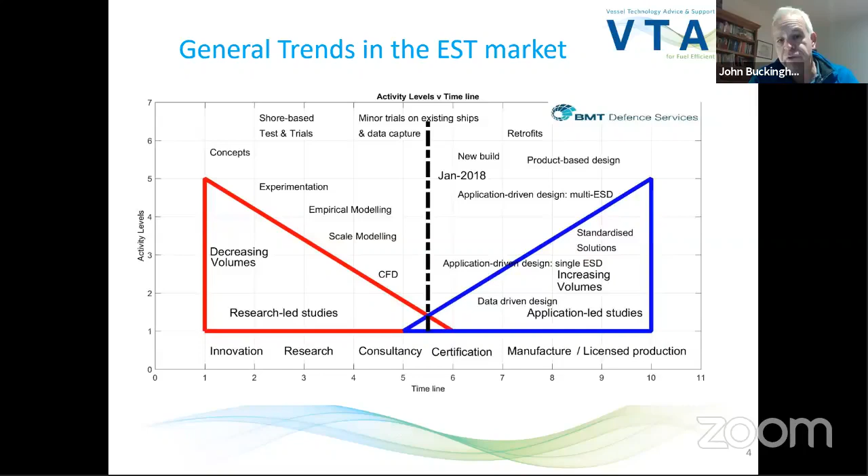I'm not going to talk through the details of every slide, but I think you can see the amount of papers and novel research diminishing as the point is made and the evidence is there, and there are increasing ships with wind-based devices. Now we've got hope. It's all about how do we make unit production cost lower to reduce payback periods, and to make the units easier to put on and off, integrate and operate.

So VTAS is all about us - BMT and Black & Veatch - integrating technologies and methods, procedures and other elements to make the whole thing move forwards.

This obviously isn't shipping being a worldwide operation, a very disparate number of types of owners and operations - there is no one size fits all, no one solution fits all. We're trying to be in the middle of a number of principal stakeholders: owners, operators, the people who can finance this as a new means of green funding. There's a greater number now of financial institutions moving out of oil and gas and other sectors into shipping and green technologies as a whole, not just for shipping. And then, of course, there's the cargo owners and those who wish to have their cargo and produce moved by ship in a way that is more socially responsible.

Those of you in the UK are going to be missing a bit of the Panorama program tonight about the reason why we're doing all this - the fact that global warming and climate change, now that we've put COVID aside, is a much larger and imminent danger, and for many people is already an issue in terms of flooding and literal inundation.

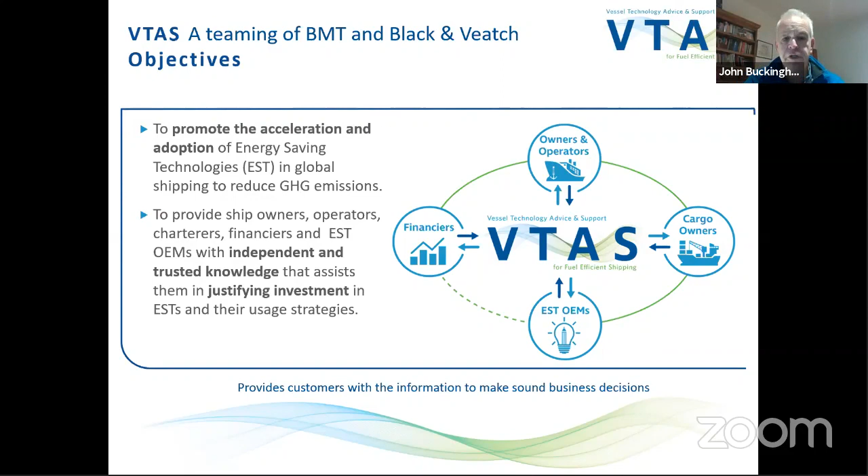So that's our objectives, and Black & Veatch and ourselves have a good match in respect to the fact that BMT is a leading marine engineering and naval architecture company, both for commercial shipping, based in Southampton in the UK, and naval engineering for the Royal Navy and other navies in Bath. So we offer quite a lot of analysis in terms of systems - not just propulsion and power analysis, but also, as you'll see, it's quite important to fundamentally understand the other systems relating to cooling and heating.

Black & Veatch, a world-famous, American-based company with a large presence in the UK in terms of wastewater and other such installations. But in this particular project, they brought with them their knowledge of port infrastructure, LNG handling, and, as you can see there, the way they engaged with the large number of stakeholders that we spoke to when we were doing the ETI project.

The challenge is, on one hand, to try to demonstrate to ship owner operators and other stakeholders why they should fit an EST, an energy saving technology, and what benefits they can expect, and the usual question is, when is the payback? Clearly the fact that we're having that kind of conversation shows it's not all just about greenhouse gas emission reductions, it's about doing something to save money.

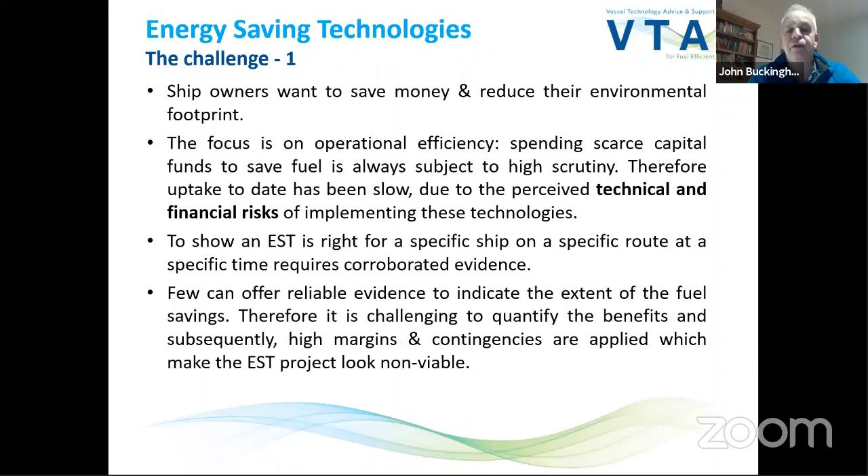So the other issue is CapEx. How do we understand better how to fit equipment to ships? How can we retrofit ships in a way that's affordable? One of the big issues is that we don't have time. The IMO wants us to introduce a reduction of 40% in energy intensity by 2030. Fundamentally, that means we've got to do things to the ships we have, not just the ships being built. And actually, because of the trade situation, there isn't a big demand for new ships, so we really have to address existing ships and find means to make them operate more efficiently.

Now, clearly, since the 2008 global financial crisis, we've had slow steaming, and that has benefited shipping and fuel consumption in many ways, but you can only go so slow. If you want to move so many units from China to Europe, if you go at half the speed, you need twice as many ships, and then, because resistance and power vary with the cube of speed, you may still make a saving, but fundamentally you've still got a massive issue with CapEx of that many ships and many more crew.

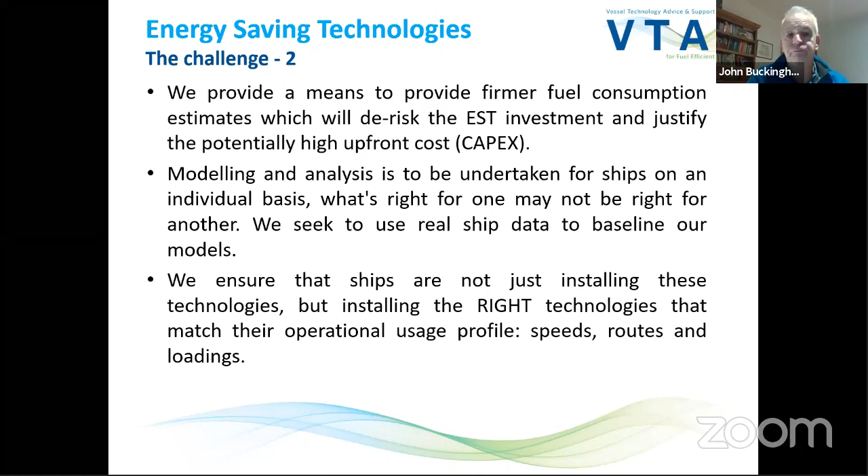So it isn't just a question of slow steaming, it's also an issue of CapEx and actually making best use of your assets. What do we try to do? We work with the ETI.

They funded us to do a project which we started about 3-4 years ago, and we studied with the ETI and Black & Veatch for about 2 years to develop tools and methods, and more importantly, insightful analysis to allow us to work out how best to get an uptake of EST. So we look at ship operations, we look at ship data, the parametric data for power and propulsion systems, and we see how the ships are operated.

What do they do? Many of them may be ferries, they may be charter-based, going from A to B and B to A, or they may be trading more generally. That's the fundamental part of what we do, but we've also been looking at alternative fuels. There's a paper you can see at the bottom there, Future Fuels for Commercial Shipping, that I gave at the RINA conference earlier this year in person.

And there is an awful large amount of scope for adapting the circular economy for shipping, where we could make better use of waste wood, waste plastic, and domestic household refuse, as they do in the States, to create fuels such as isobutanol, which can be used as drop-in fuels to help reduce dependence on fossil fuels.

They're not the ultimate answer. The ultimate answer is zero carbon fuels, electrofuels from green energy: ammonia, hydrogen, etc., methanol. Obviously methanol still needs carbon, but fundamentally these are considerations for the immediate situation, and many of these products are disposed of in a way that's not very efficient, so-called waste to energy, where a lot of them are just burnt for heat and not actually transformed through thermal hydrolysis to useful fuel.

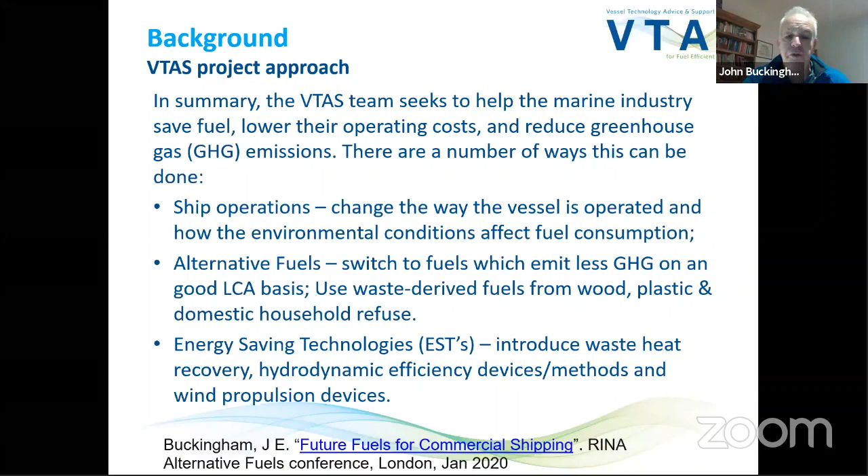So we generally categorize energy-saving technologies into three principal sectors: the wet, the warm, and the windy. Wet is hydrodynamic, whereby it's fundamental that we try to make sure the hull has less resistance, the propeller is more efficient, and therefore there's a lower power reduction on the shaft line.

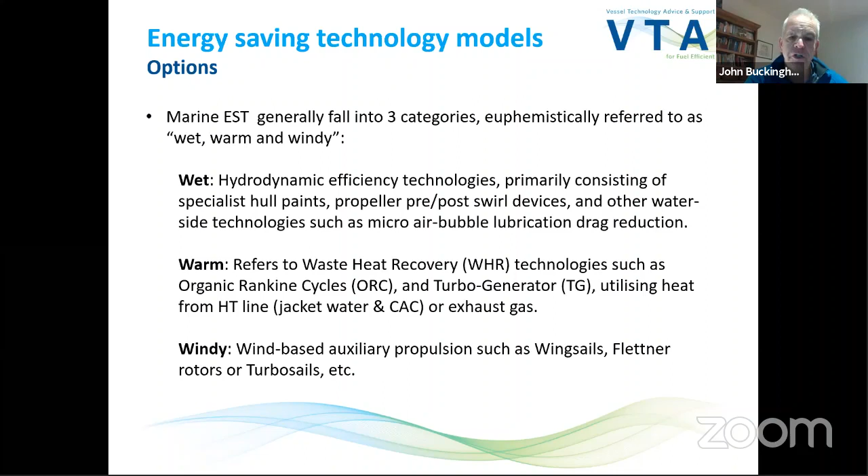Warm addresses the fact that internal combustion engines generate heat when operating. So we take heat from either the jacket water, charge air cooler, or exhaust gas to drive things like absorption chillers to make chilled water, or organic Rankine cycles to make electricity. But ideally, you reduce the load in the first place by having lower resistance and lower loading on the machinery. What wind gives you is the fact that you're using renewable energy at source directly on the water, without using green fuels, to fundamentally reduce the load on your machinery and therefore reduce fuel consumption for propulsion.

I'm talking here generally about larger vessels, seagoing vessels, cargo, tanker vessels, and maybe container ships, although they're not very conveniently designed for wind-based devices. But fundamentally, I'm talking about solutions that don't involve batteries or hybrid batteries, because the energy and size of batteries for ocean-going journeys would be considerable.

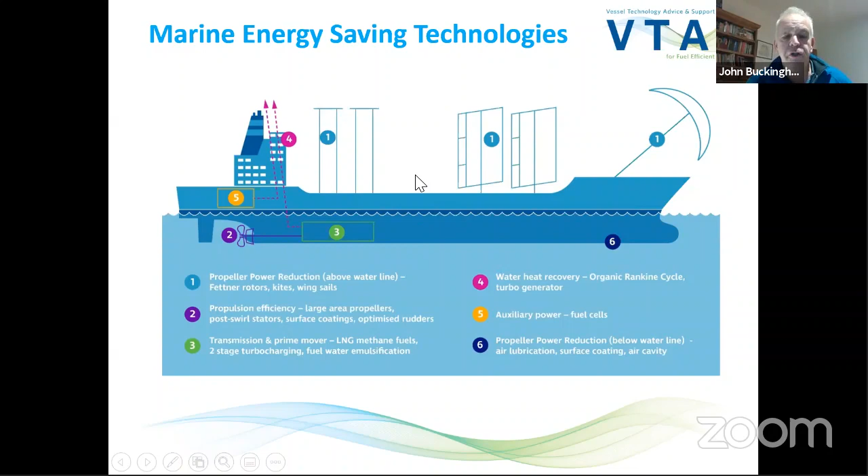Even though I'm going to talk mostly about wind-based devices, I've got a listing here of major equipment and solutions, some of which have fallen out of favor. We used to have a Grim vane wheel on the QE2 liner many years ago, but it fell off, so there's no supply chain for those anymore, really. There's no demand, but propeller boss cap fins are popular, albeit they offer 1 or 2% at most.

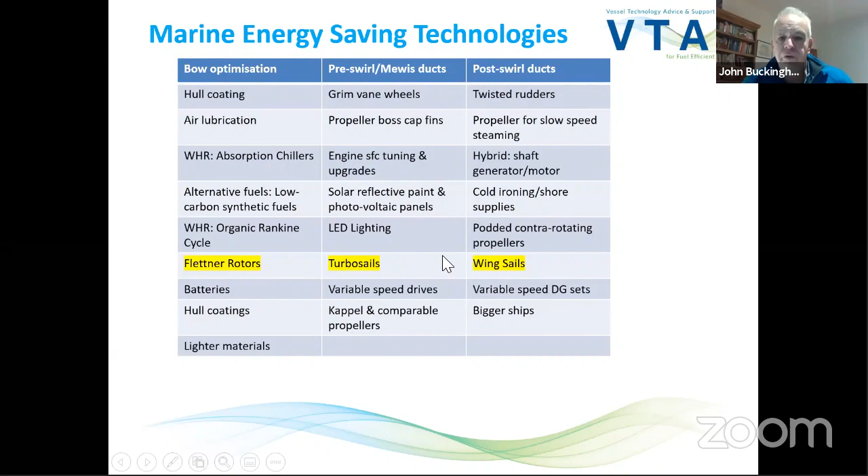I'm not going to go through all these, but you can see that they all collectively provide a benefit. It is arguably better that the wind-based devices can offer the quickest way of reducing the emissions on a ship.

So in short form, we model the ship's resistance. There's methods like Holtrop and Mennen, or ideally we might put it through CFD analysis to work out the resistance that way. We model the propulsion system - we have the propeller KT-KQ curves and the engine characteristics. And we seek to build our software model, a mathematical model of the ship's power and propulsion, with the data we get from real ships - ship data, as I call it.

We model the energy-saving technologies either using first principles - trigonometry and published values for lift and drag - or we work with suppliers of energy-saving devices and use their own coefficients. The principal wind-based energy-saving devices we use are these three. More about those in a minute.

Fundamentally what we're trying to do is show, in historical form, for past ship voyages that those ships undertook, what would happen if they'd had a different energy-saving device on board. What fuel saving would they make, and consequently what greenhouse gas saving would they make? Obviously the greenhouse gas, usually CO2, is about 3.1 times the fuel saved, so if you saved 1 ton of fuel, you'd save about 3.1 tons of CO2 emitted to the atmosphere.

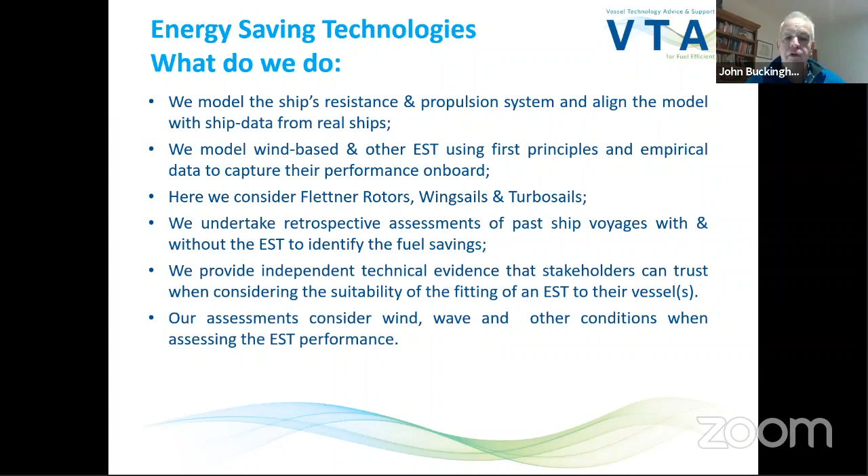Unfortunately, so much about modeling with data is all about getting good data about ships and their cargo loads. The ship at sea will have hull fouling, which is difficult to identify, but we've got ways around that.

The fundamental thing we do is make sure we declare all our data up front so it can be challenged, and obviously people can review the models and approaches we make.

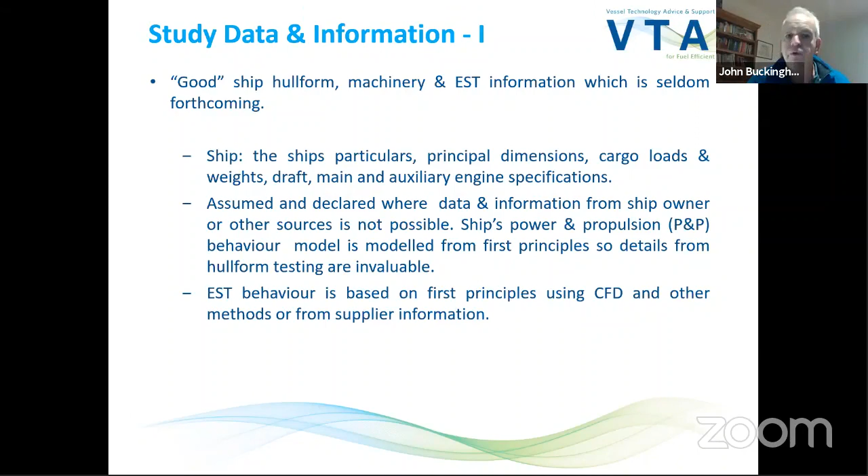We have two models, static and dynamic. Static models are where we look at the ship situation at every knot speed from 1 through to top speed, with and without the energy saving device at different sea states, and we also consider all the different parametric data from the sea all the way through to the fuel.

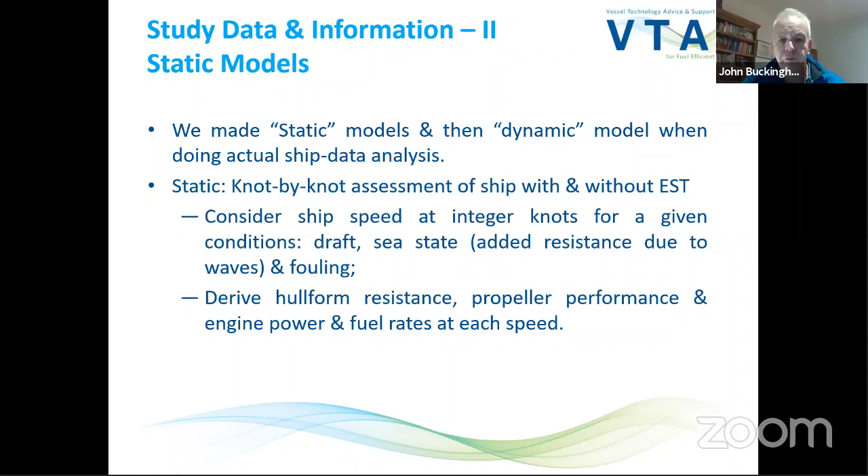Dynamic is where we take the ship data, analyze each time step, each increment of data, and work out the location of the ship using various meteo sources. We use quite a lot the European Centre for Medium Range Weather Forecasting data offline, and there are numerous others.

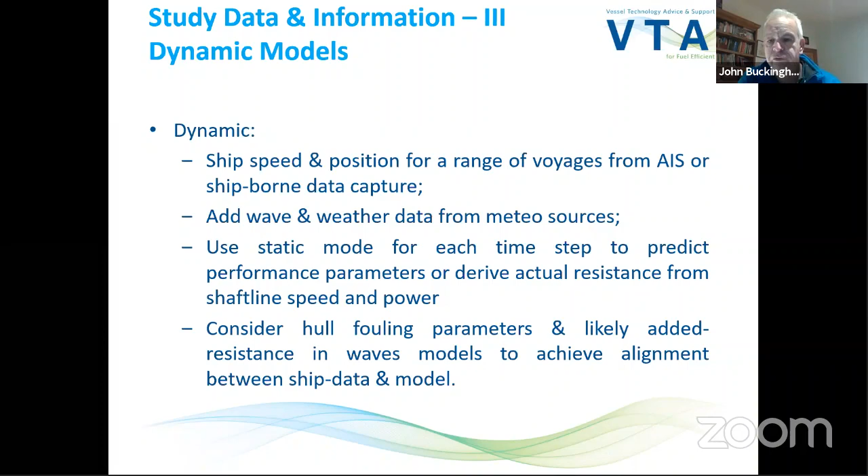We add the weather data to the situation so we can then analyze that ship in that particular sea state, with wave height, wind, temperatures and such like, to work out basically what the forces are on the ship.

Much of the data - many ships today have fleet performance management software systems that capture data, either sampling every second or all the way through to say 5 minutes, where it may be a composite of process data for 1 second.

We've worked with different ship owner operators, treating each of these in their own way, in a way that allows us to interpret as best we can the performance of the ship and, more importantly, its behavior.

The 1 second data can be very challenging in other ways, because what you're essentially looking at is the behavior of the ship when it's pitching, rolling, and yawing. So fundamentally there is a dynamic component - the ship is accelerating forwards, up and down, and around.

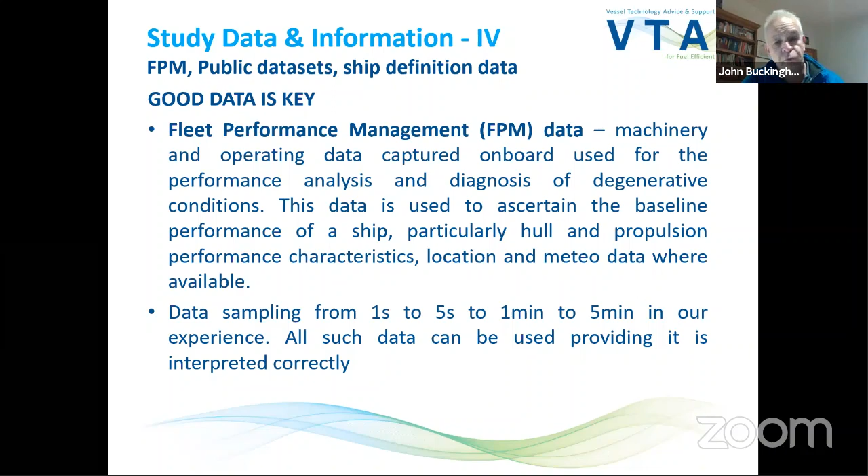That's why the analysis always has to be interpreted very carefully, because fundamentally we're not doing a sea keeping model - we're actually trying to interpret data on a 1 second basis. When you see that data varying considerably from one second to another, you also have to be mindful of just how good the sensors are.

Meteorological data is very important. Humidity is important in terms of the density of the air, and that's important for wind-based devices.

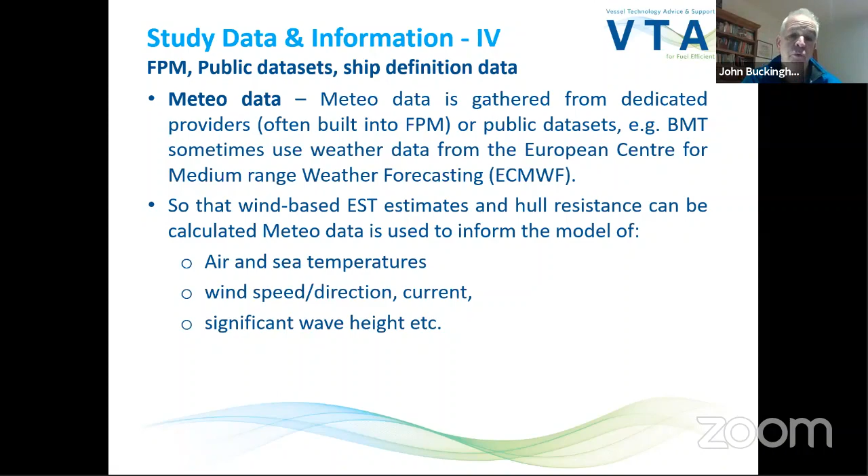The significant wave height is important so we can try to better understand the added resistance in waves. We do a force balance on the hull - in this case it's a Flettner rotor - looking at the forces due to the apparent wind, which is the wind based on the trig combination of the true wind plus the ship speed.

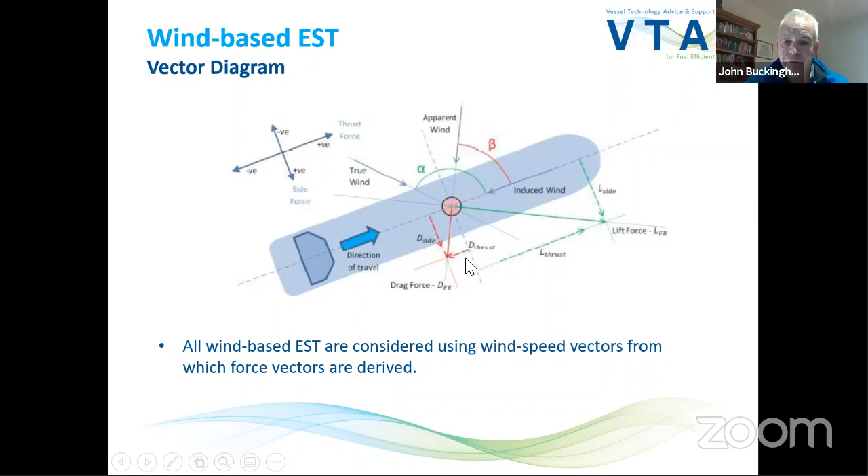We've got the drag due to the wind passing over the Flettner rotor and the lift component, and those two get combined to provide the actual thrust. Of course, you also get side force, and that affects the listing or heeling of the ship as well.

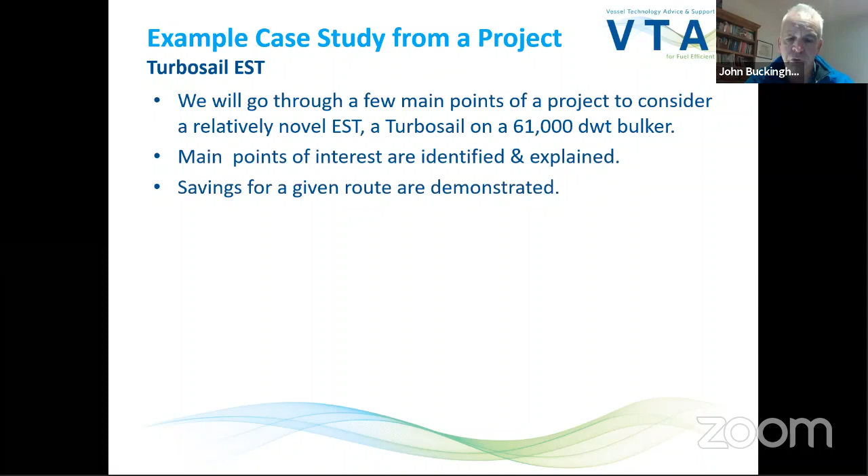As an example, I'm going to go through a project we've done with a turbosail on a 61,000 deadweight bulker, but I'll also be showing you some Flettner rotor work on this as well.

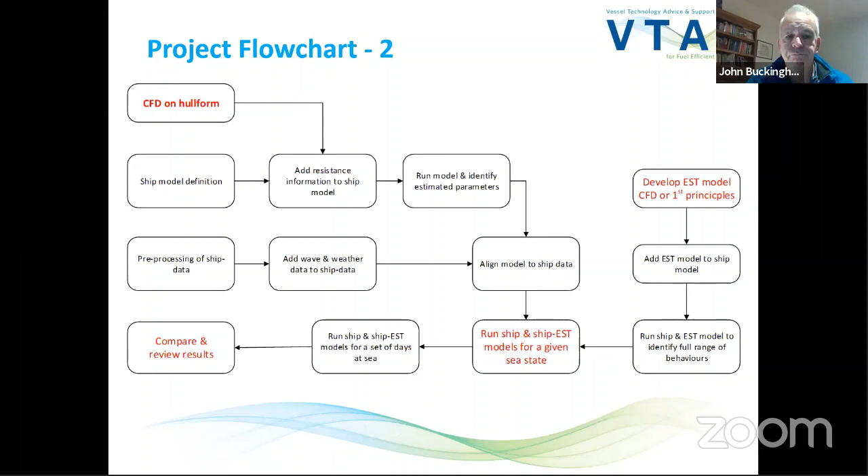This is the kind of high-level project plan on how we address a project such as this. We've got a pretty good idea on what we do, one thing after the other. I'll just talk a little about the ones in red since we're limited for time. The ship in mind is a 61,000 deadweight bulker - principal data points there.

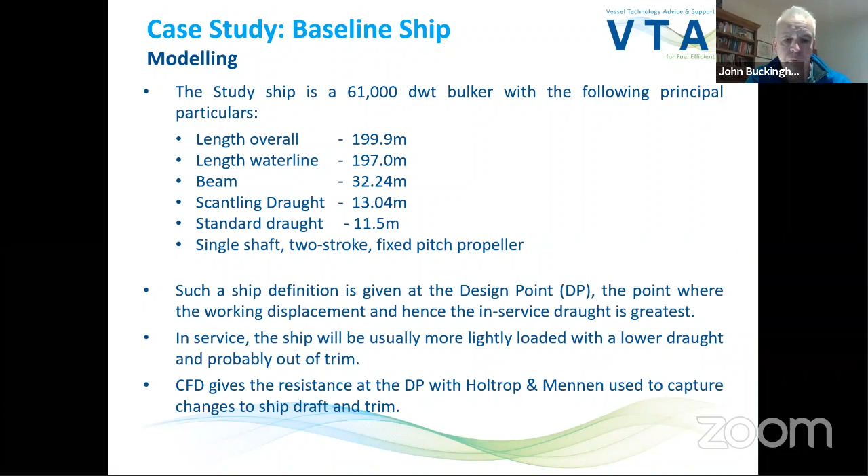One of the things we try to do is align the data we get from the ship with our own model for hull, prop and main engine, and also analyze the hull form using 3D modeling and CFD. We've used NumECA, but at BMT we're now using ANSYS as well, and we trial many different methods and software to address that.

We also identify from our database of hull forms that go back over 50 years, from when BMT was part of the British Ship Research Association, and also tied up with the National Physical Laboratory in Teddington, Middlesex.

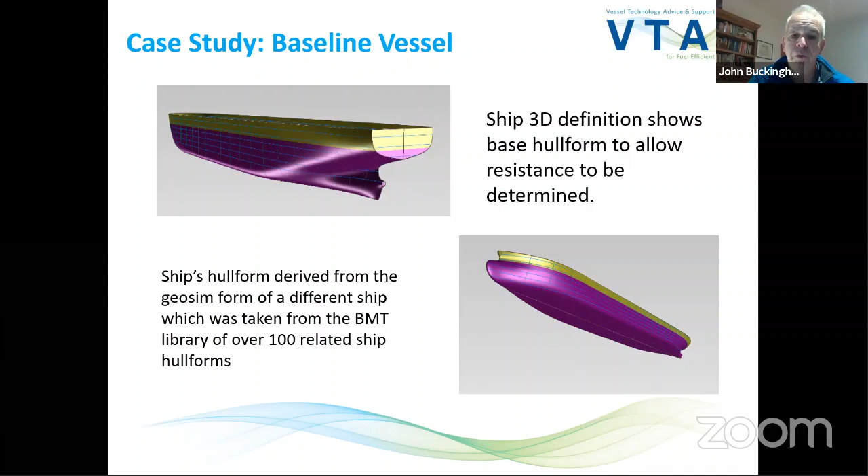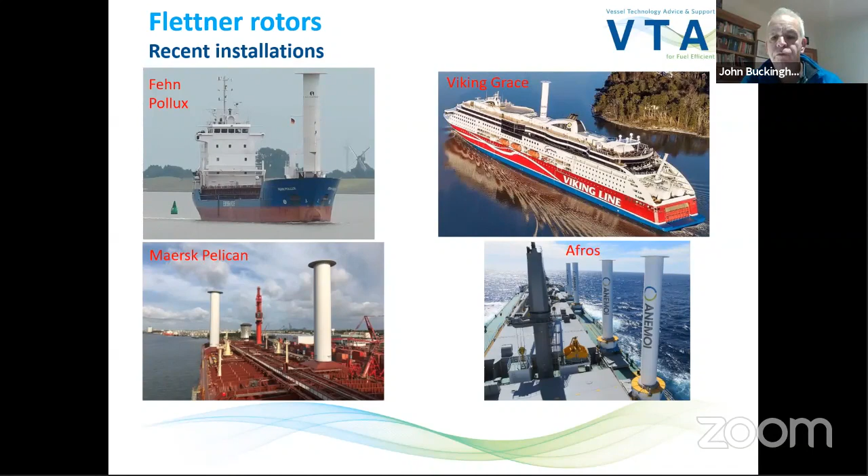And then bottom right, you've got Afros. The MV Afros has got 4 wind rotors from Anemoi Marine Technologies, based in London. And if you can see in the picture there, novel means for moving them so that you can access hatch covers and such like.

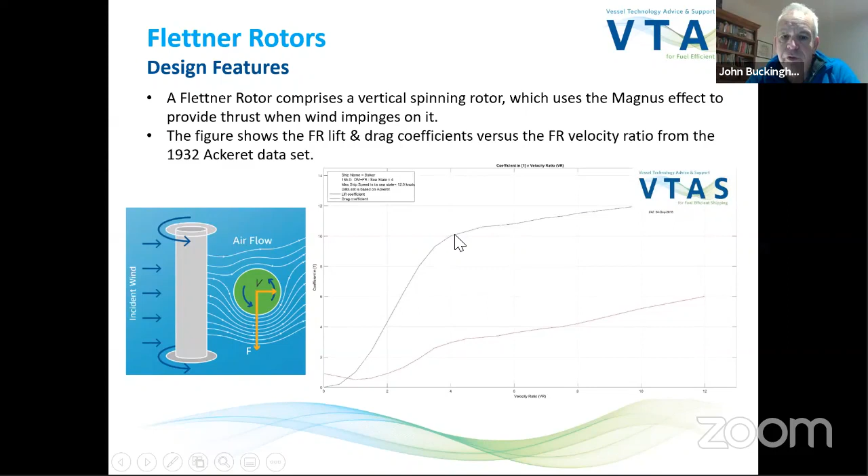So what is a Flettner rotor? Well, it was designed by Anton Flettner back in the 20s, and basically he looked at it for helping increase the lift on the front wings of aircraft, but he also derived it for use in driving ships, or his own private yacht. What you can see there is the lift and drag coefficient. As the velocity of the rotor goes up, we get very high lift coefficients of about 10 using the area of that particular Flettner rotor.

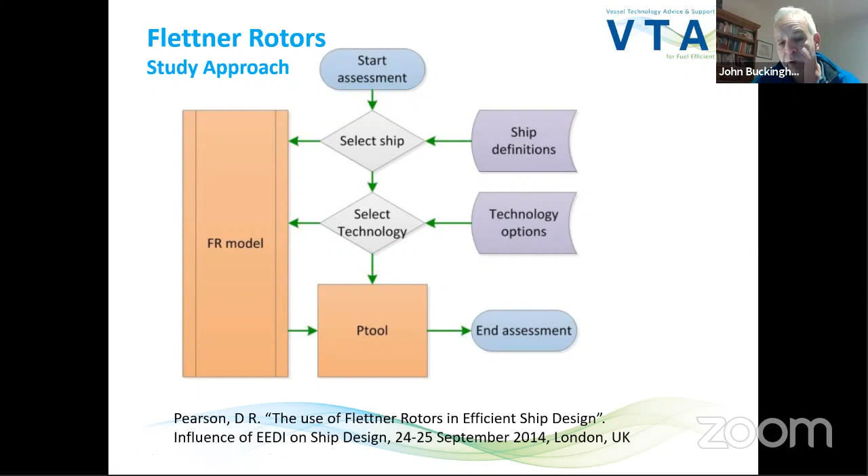So what do we do? We've got a Flettner rotor model, fully trigonometrically wired up, which considers all the power required to drive it, as well as the issues with drag, and also what speed you need to turn it to get the best benefits. Our own software, called Ptool or VESDA, we've got 2 different types, which allows us to do the assessment based on the ship definition and the technology definition. David Pearson wrote a paper back in 2014, which is on ResearchGate, and that gives a very good idea of the kind of modeling we've done. We've improved the model a bit since then, but the fundamentals are the same.

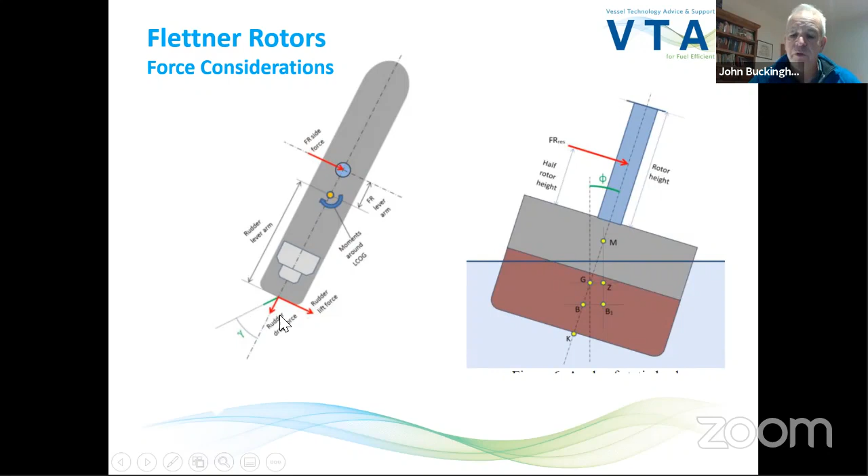I talked about the forces due to the wind on the Flettner rotor, and also the angle caused, accentuated here. But more importantly, perhaps, if the ship is rolling, this effect is minimized. Actually, we've heard that sometimes the forces due to the Flettner, just like in sailing on an ordinary sailboat, can dampen the roll motion, so that's not such a bad thing. But also at slow speeds in high winds, the Flettner, when running, can cause issues with moments around the center of gravity, and consequently the rudder angle may need to change, and we model that as well. We also, because of manoeuvring at slow speeds, have considered the wind direction and speed, and how the Flettner rotor may need to be modified in terms of its speed and direction.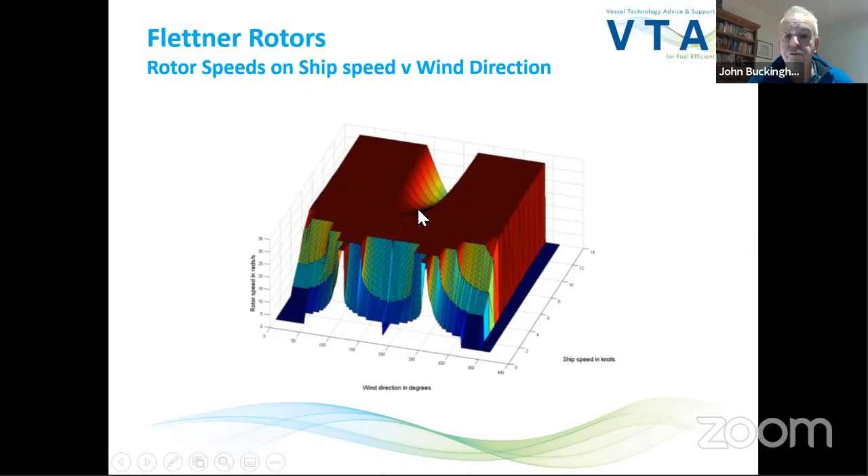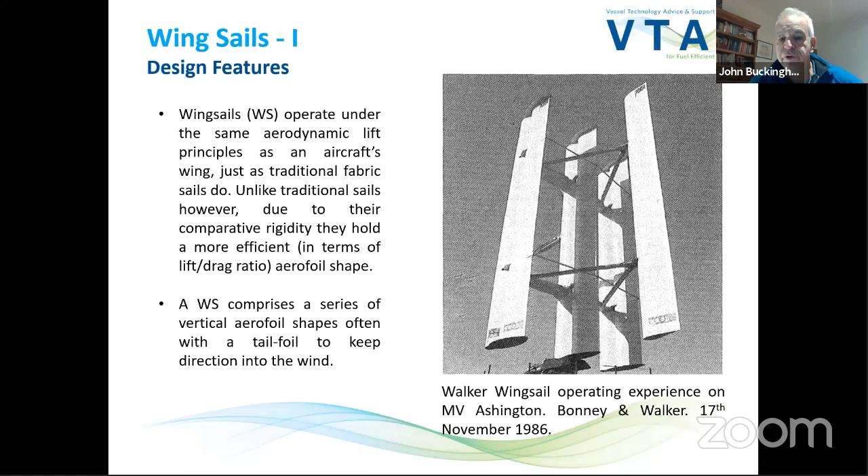Another wing design, undertaken over 40 years ago, is the Ashington, designed by John Walker - the Walker Wingsails. As you can see, they're essentially vertical aerofoils, which provide a much higher lift compared to an ordinary sail. They were fitted on the Ashington, atop the bridge, the wheelhouse, and the master of the Ashington, who lives near Bath, who I met a couple of months ago, is always very positive about it and how beneficial they were for manoeuvring, for pulling away from the wall if the conditions are right. But clearly that company is no longer in existence.

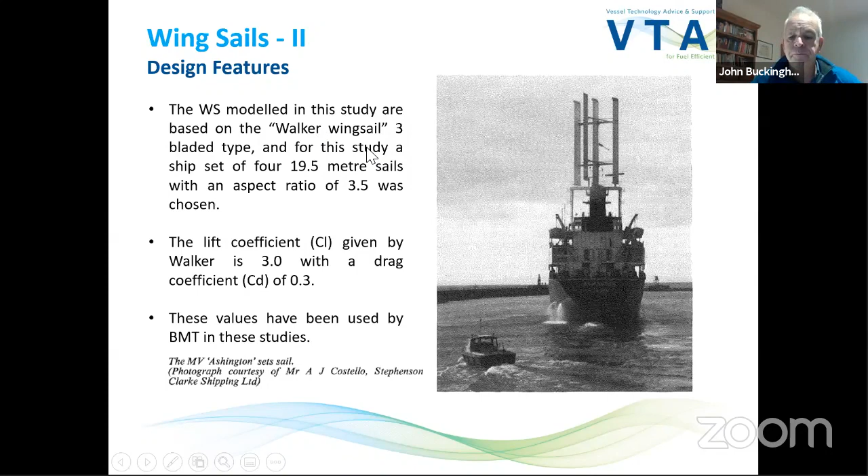The modern company taking this up, not necessarily with exactly the same design, is a company down near Southampton called Windship, which is also using technology from the America's Cup and other high-tech yacht racing to try to bring this through to commercial shipping. I'd like to draw your attention to the issues commercial shipping has, especially bulkers and tankers, with fitting wind-based devices - obviously the visibility from the bridge looking forwards. That's something I'll talk about later.

The turbo sail is the third technology I want to talk about. Basically, it was a way of having a smaller sail using an egg-shaped profile, but also using a suction side and a small fin to basically give some lift. This was originally conceived by Jacques Cousteau and his son, and they fitted it to their yacht, the Alcyone, but it was never developed further. People more recently, like Hcini, have done papers recognizing that it has benefits.

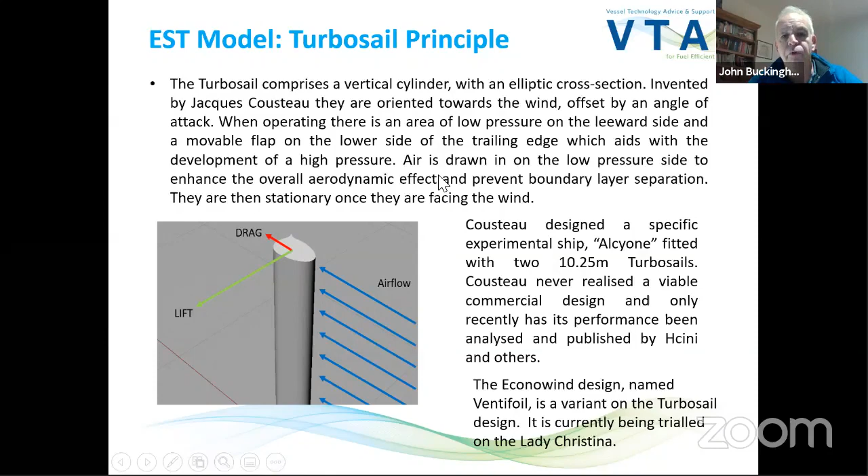A Dutch company called Econowind now have their own product called the Ventifoil, which is now being moved onto various vessels. So how does it work?

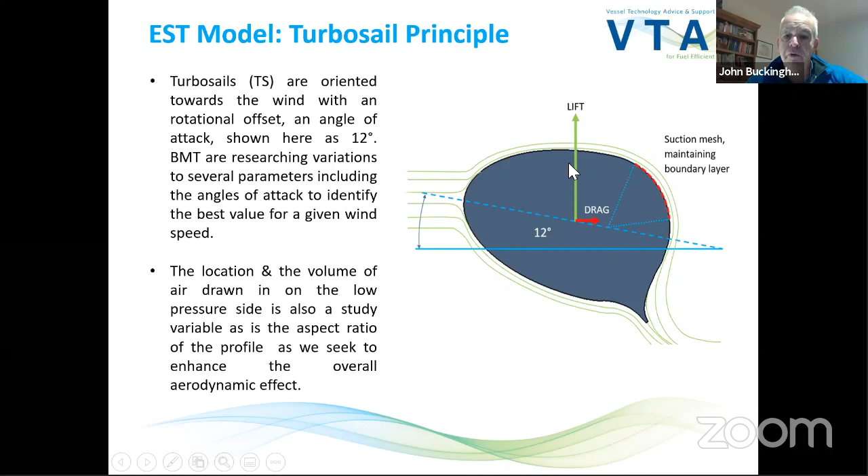Fundamentally, we're still trying to get the benefit of a higher pressure here and a lower pressure here. The lower pressure is also enhanced by this suction area, which maintains the boundary layer around the edge of the turbo sail, thus increasing the area of low pressure so that you get the biggest benefit around the egg shape. Here's the Lady Christina.

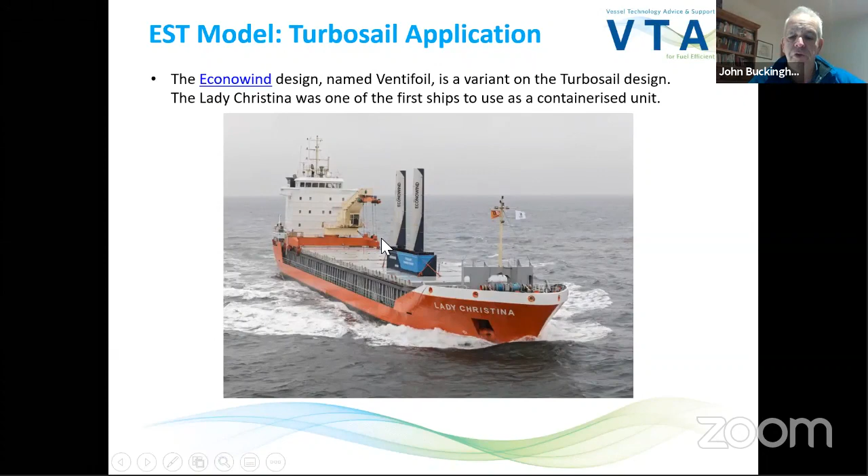You can see they're fitted here to the inside of a container. They can be folded down and put in the container. This was very much a couple of years ago when they were developing the technology, improving it. Now it's fitted to a few more ships, and there's probably many more that they have in production. But these are just a few to give you an idea of how they're moving forward.

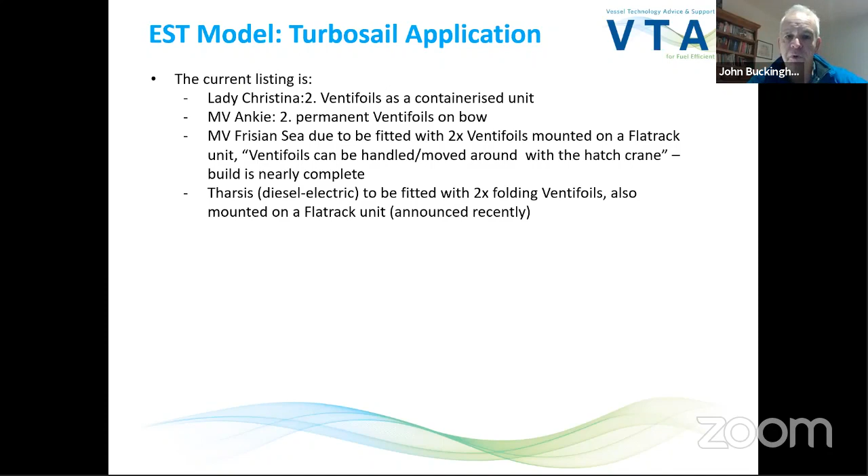My colleague, a year in industry student that we had called Will Hopes, is giving a paper at next conference at RINA next year on wind-based devices, and he'll be talking a bit more about how the turbo sail has been modelled by BMT.

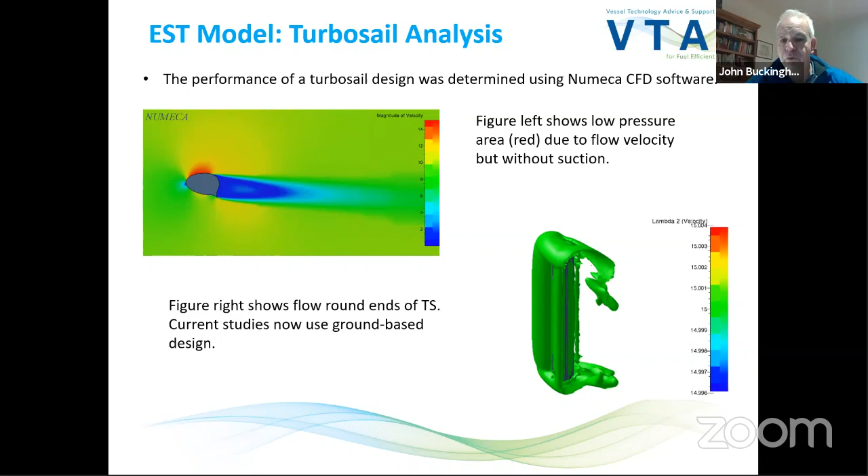The work we did looked at the issues of without suction, how we basically lose the connection around here, and then we've also looked at issues with the end losses of thrust at the ends, and obviously it's important to also have a deck when you're modelling these devices.

If you actually have the suction, you have the boundary layer going further round, your lower pressure area is further round, and therefore you get a better overall performance. Again, this will all be in Will's paper that he's writing with David Pearson.

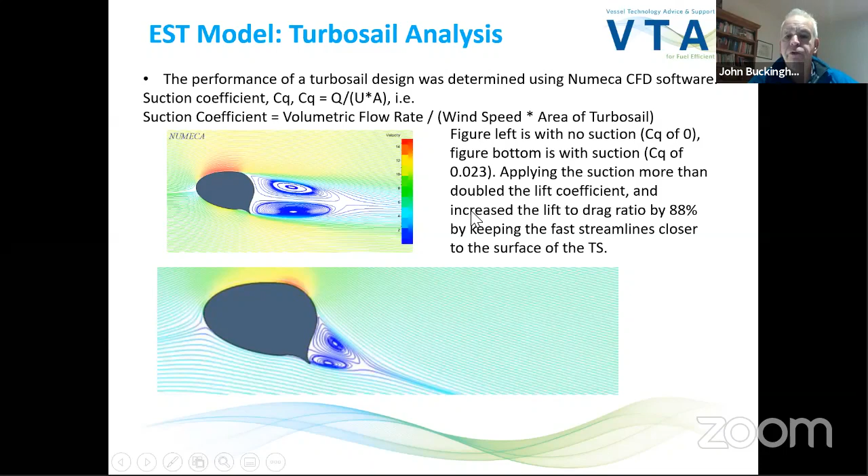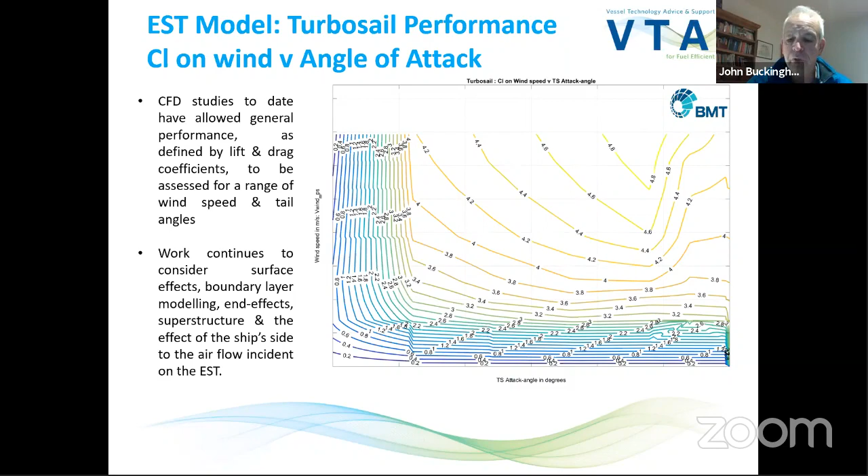In our early studies, we looked at the different angles of attack of the wind on the turbo sail, trying to work out what angle the turbo sail should be to point into the apparent wind direction. So we did some work on that. This is just indicative data, but it was very important to try and work out, for something that was relatively new, just how would we use it to our advantage.

I talked about the issue with visibility from the bridge for COLREGs, so they have a requirement to see so many ship lengths ahead, I think it's 2-3 ship lengths, but also there must be no more than 5 degrees blockage for plus or minus 10 degrees of the center line.

So we have software which allows us to do a quick first pass on this, so we can look at these 4 Flettner rotors - well, they could be wingsails, they could be turbo sails - and work out and make sure that we're not breaking the rules for blind sectors.

I was speaking to Gavin earlier, and basically even though there are these rules, flag states have scope to give some concessions based on whether they are only slightly exceeding the blind sector, but also they can make decisions based on multiple cameras, multiple people on the bridge keeping watch, as long as that's maintained - given today most bridges are almost full beam - there's all kinds of ways of making sure that the navigation and the COLREGs and such like are all meeting the necessary safety standards.

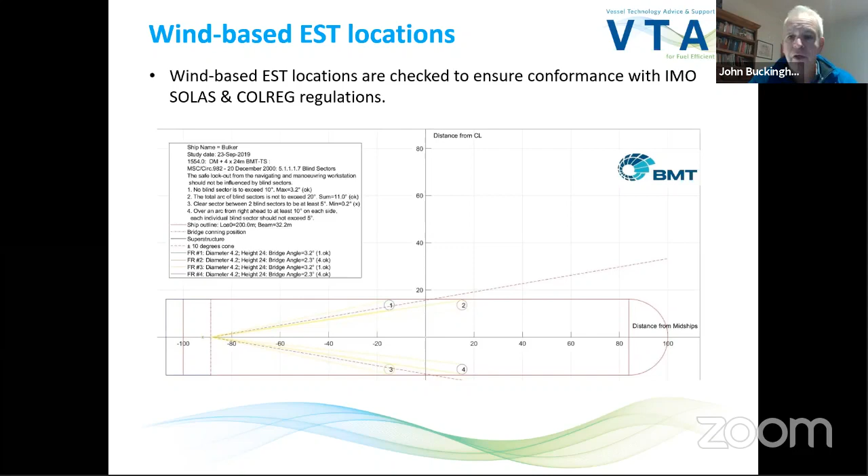Putting cameras and CCTV on the bow may require duplication, redundancy, and these are the kind of measures that are being addressed. Obviously, with autonomous shipping coming through, such measures have got to be introduced anyway. So hopefully some way forward can be agreed by all the different parties.

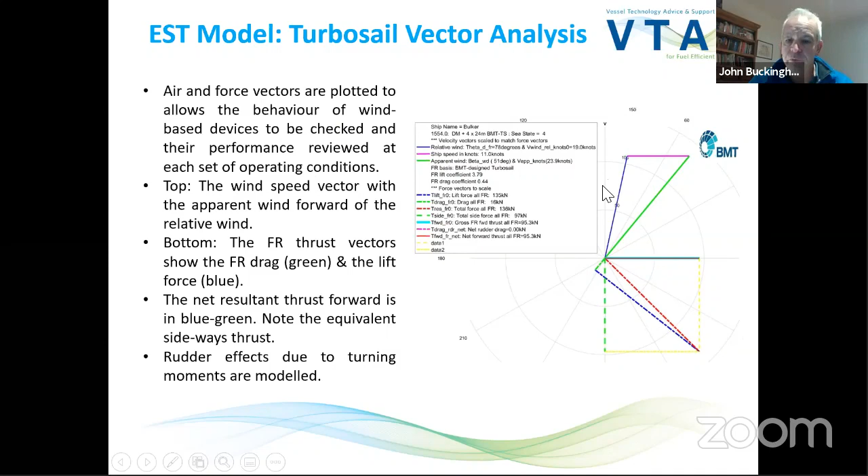You saw this plot at the very beginning with my short video. We have the actual wind, you reference the ship, you subtract the ship speed to get the apparent wind, then you get the drag, you get the lift, and then you get the resultant, and that resultant has a component going forwards and a component going sideways. And then we also include the rudder effects as well.

In the static analysis, we look at the thrust at different polar angles from the ship. So this is obviously one side. If the wind is coming from here, this is the actual thrust that we've got. So we can work out whether we've got a reasonable benefit from this particular installation or whether we need to have a bigger one.

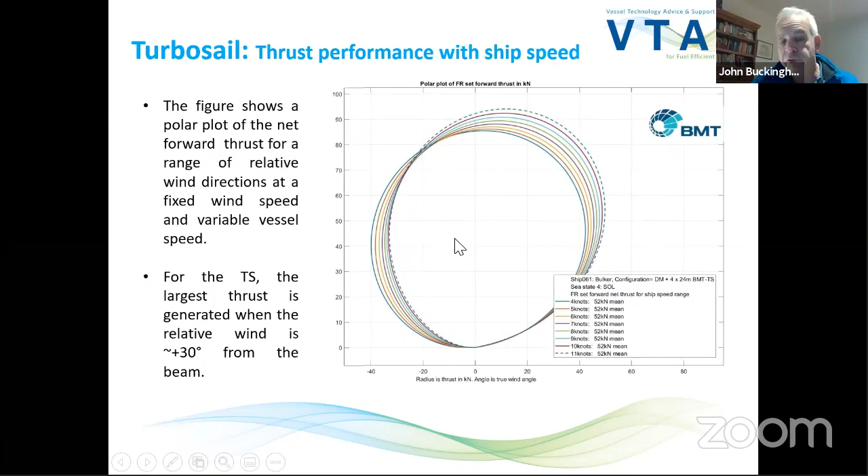The thing about wind is it isn't always blowing everywhere and at the same time at the right speed that you might like and in the right direction.

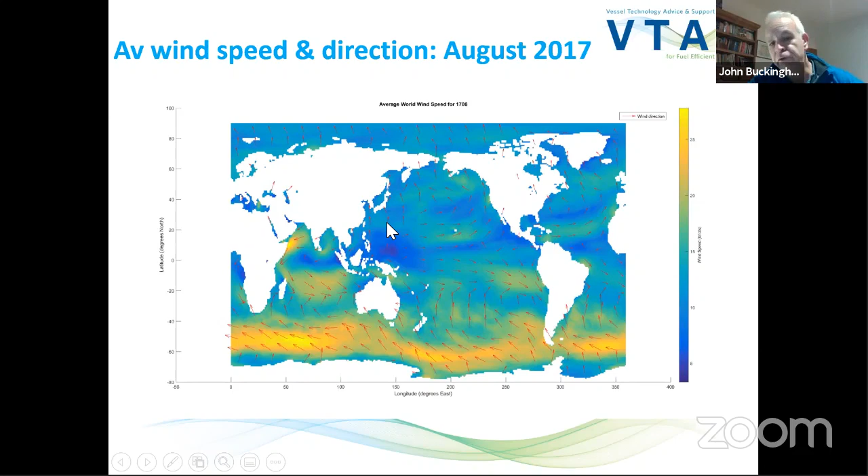And here we have, again, just to show, obviously we've got all the wind down here, but so much of the shipping comes from China, around Singapore, across the Indian Ocean, and up through Suez and the Med. And there isn't always that much wind.

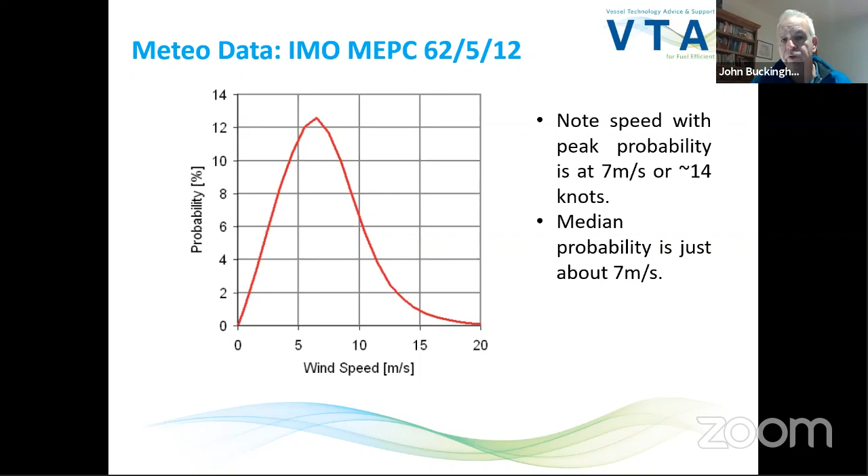So it is difficult sometimes when you look at the retrospective analysis to squeeze as much benefit out as possible. And if you look at the probability data, you can see in this plot that 5 to 10 metres per second is the biggest area where you're going to get wind. And then, of course, only half the time it's going to be maybe on the port and starboard quarter. So these issues are important when you look at the routes for designing your equipment.

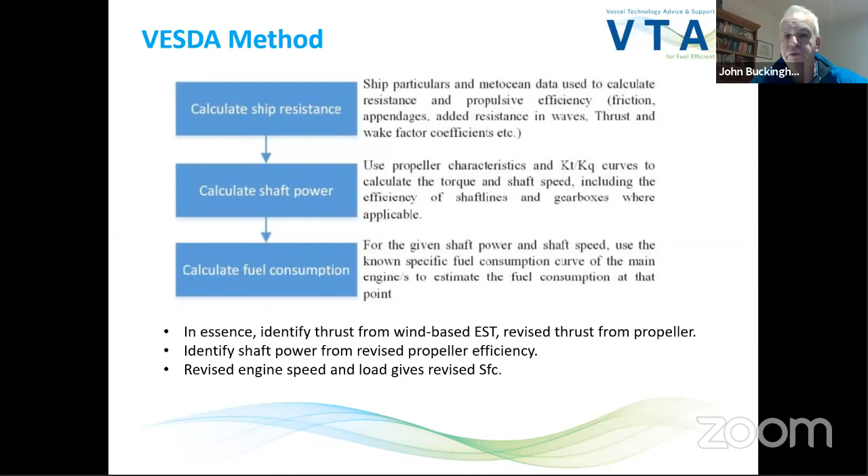Talked about the fact we have to estimate the resistance. We did so much time trying to work resistance out from first principles and empirical methods, but we've worked out another way to do it now.

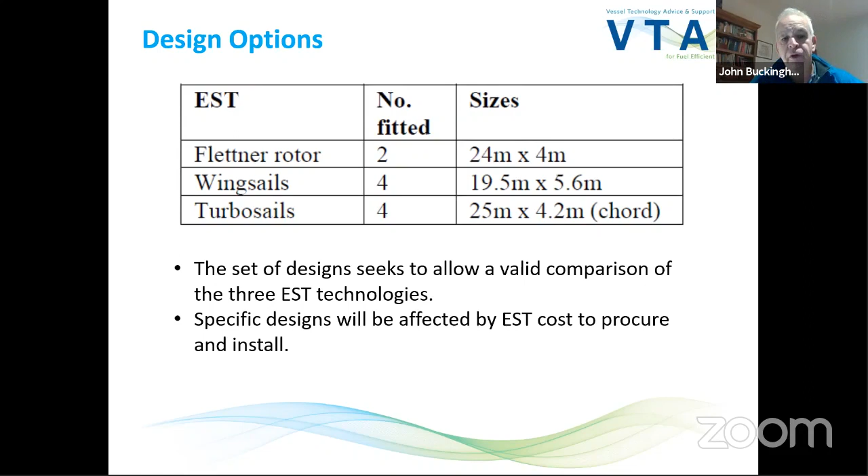So what we looked at is these kinds of technologies. Typically the Flettner rotor has a ratio of 6 to 1 height to diameter, and then you can see the wingsails that we've got there. I'm not going to go through these in detail, but fundamentally we then do the static analysis.

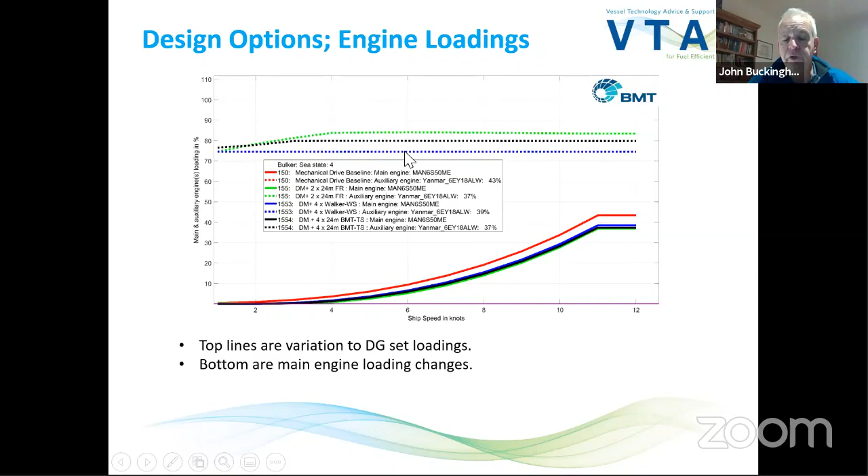Where we show the different loadings across the ship speed on average, we're averaging around the benefits of the wind-based devices. So the red one is the mechanical drive, the baseline, and these other solutions in different colors are the alternatives where we're getting benefits. And then up here, we also look at the extra loading that you might have in your auxiliary engine due to turning the Flettner rotor or the suction device for the turbosail.

And basically the wind device makes the effective resistance lower. That's the idea. This is shown for sea state 4. Clearly sea state 3 and 4, which is a good representative of the overall weighted average, shows that you do get benefits for these particular installations that we've shown: the Flettner rotor, the turbosail, and the Walker wingsail.

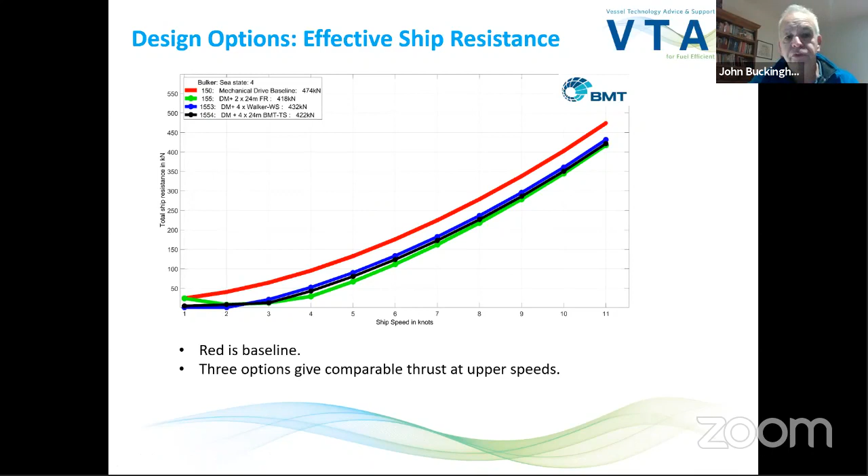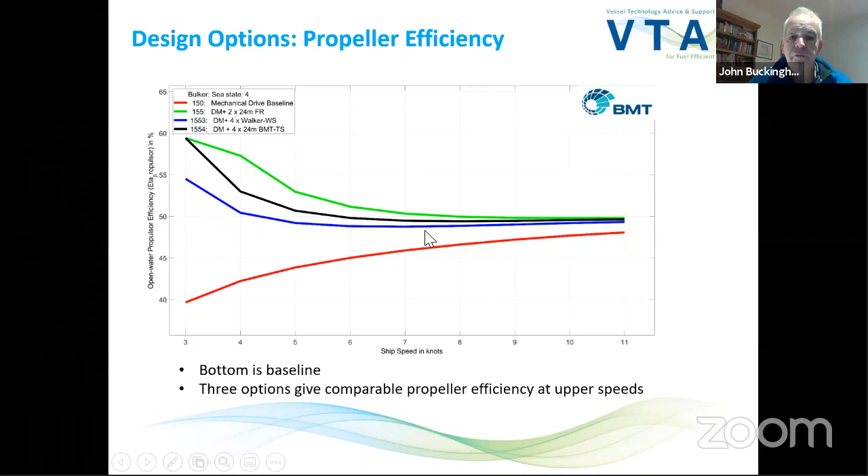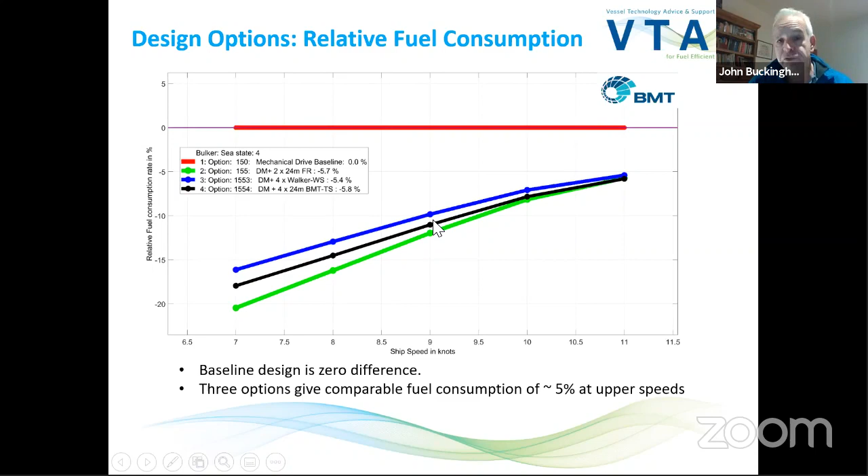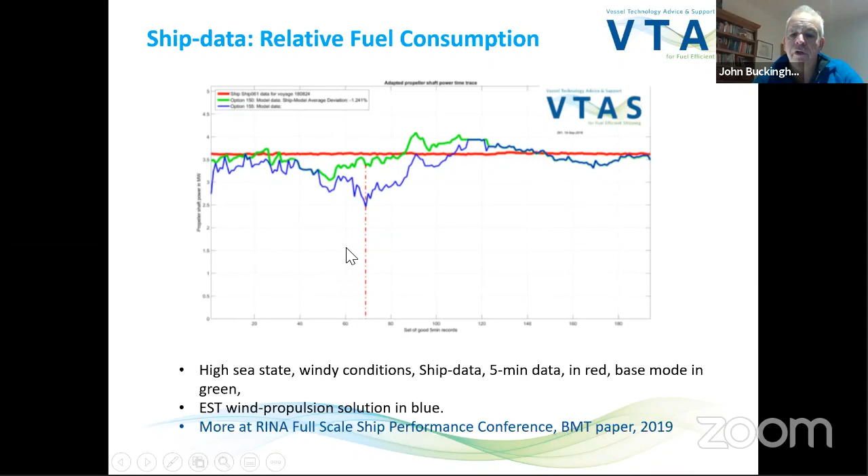So what is our method? How do we do it? Well, what we've worked out is we get the ship data from either the owner operator or other sources. We take the Met data from the European Centre for Medium Range Weather Forecasting, and then we basically work out the resistance back down the propeller shaft from the propeller shaft power speed using the propeller characteristics, and also our own knowledge of the thrust and wake factors.

We work out the thrust for that particular situation, that moment in time, from the wind speed and direction, and then we reduce the resistance to work out what the engine and propeller would have seen had the Flettner rotor or whatever device was working. And then we've got new data for the propeller and for the fuel loading.

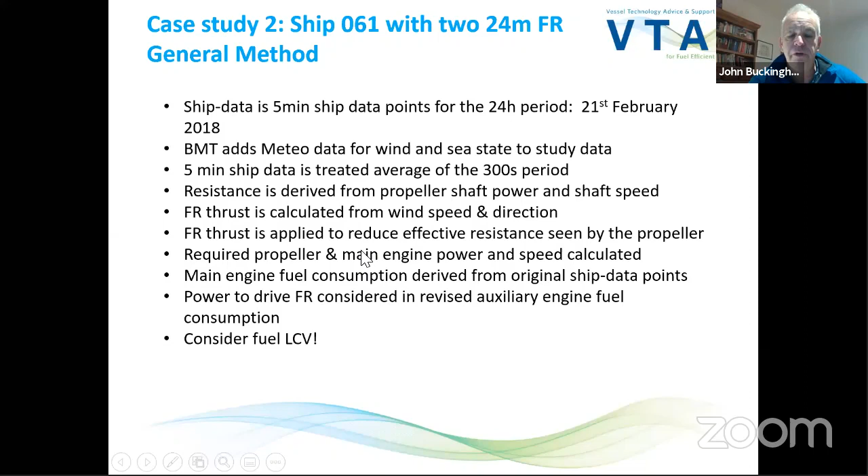But it's important to consider the fact that when we get ship data and data from test bed trials for engines, the fuel's lower calorific value can be varying, so that can give issues.

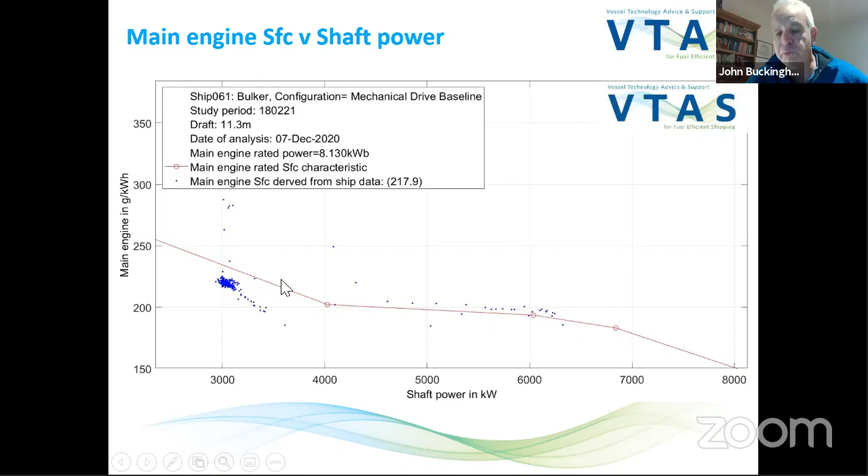So here we've got main engine versus power, and you can see the data points from the ship data here. At this low load, because it's slow steaming, we've got an offset, and that will turn up later in our modeling.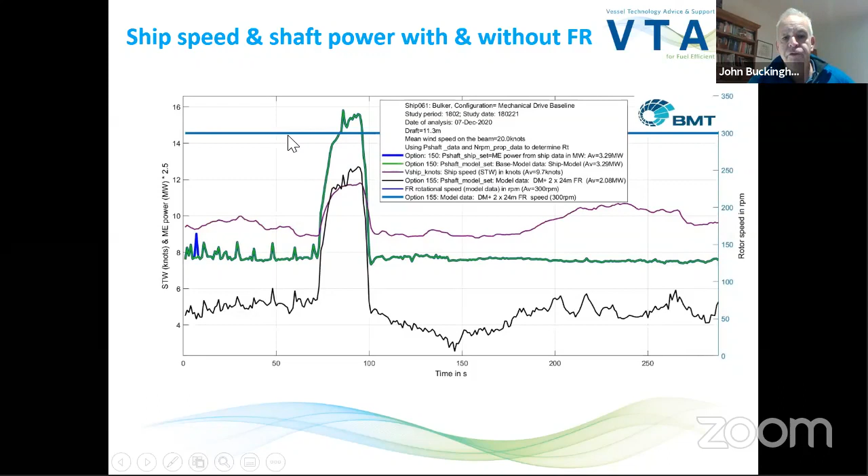But then when we add the Flettner rotor, you can see that we're benefiting considerably in this particularly well-chosen example on the 21st of February 2018, where we've got a significant benefit. The purple is the ship speed, so she's going along at about 9-10 knots, and this is the Flettner rotor speed, 300 RPM.

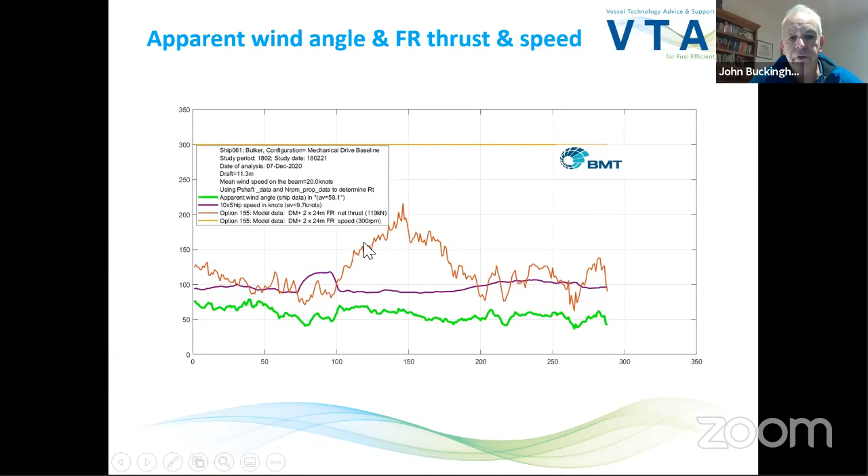Another kind of result is that we've got the apparent wind. This is near enough on the beam quarter, really good angle. We've got the model data here, and then we've worked out the ship speed again. Here's the blip with the ship speed, and then the thrust that is being provided overall.

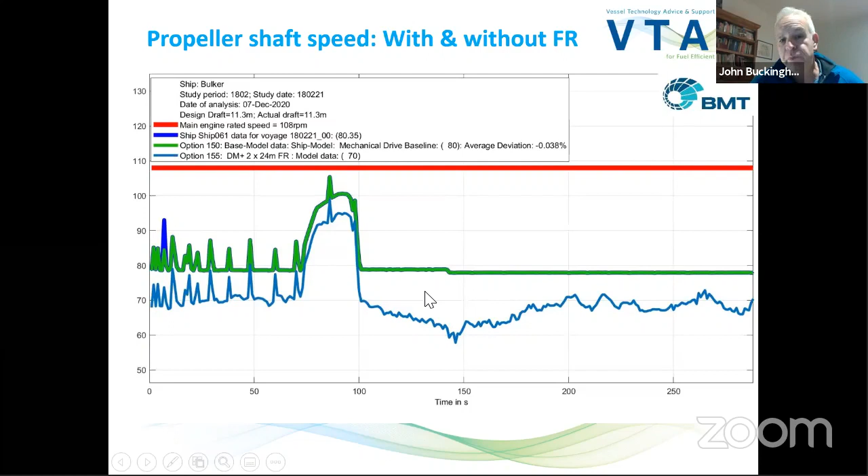In practice, it's likely they'd operate the shaft in a way that was consistent with the Flettner rotor, given that this is point-by-point data, but the ship itself has got inertia, so this is indicative.

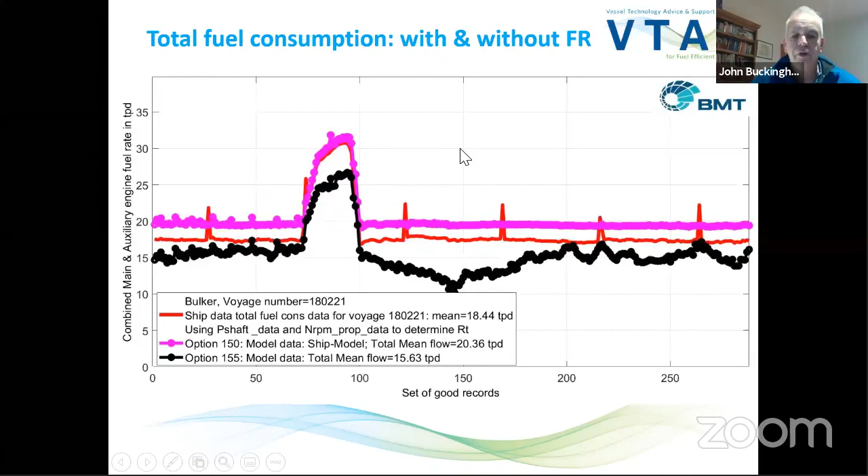Most importantly, the overall fuel consumption you can see here in black is with the Flettner rotor, and here in magenta we've got the model of the ship, and this is the ship data in red. So clearly we've got this offset due to the calorific value of the engine fuel, and that's something that when we're doing modelling in detail, we align and make a bit more effort on.

So basically, I've shown you how we take the ship data, add the model, add the information about the operation of the ship, which also includes its draft and other situation. We work out the reduced loading on the propeller due to the Flettner rotor or other wind-based device, that gives us a reduced propeller load, and we can then work out the fuel consumption. Looking back at any fuel data, any retrospective ship operating data, allows us to look forwards.

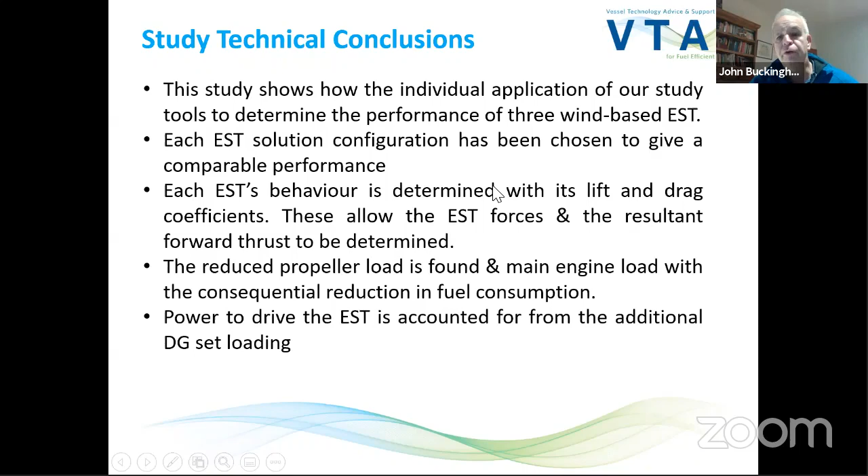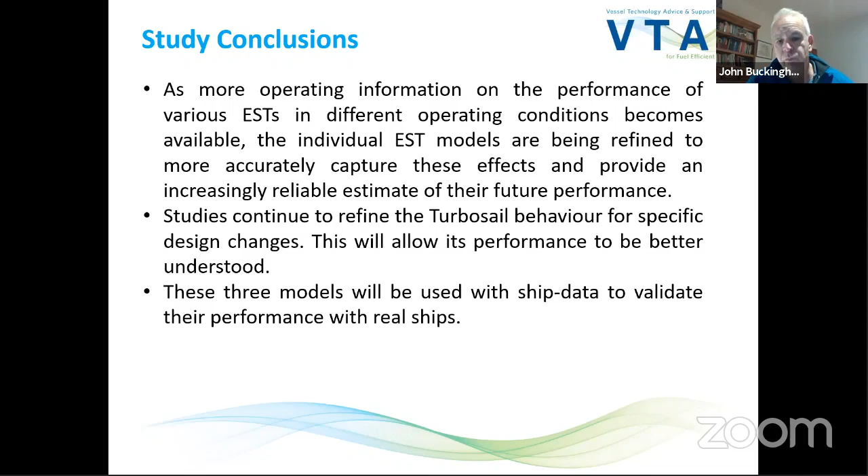Clearly, more and more operators have this data. We work in confidence with these people, recognising that the data is valuable, both for charter parties and other stakeholders. So we work closely with people in confidence, and that's a fundamental part of what we do. As a company that works with governments and government agencies, we're used to working in confidence with computer systems that are protected and such like.

So that's it, I've cantered through pretty quickly. I hope you've got a few questions. As you can see at the bottom there, VTA has a website, so you can go and have a look there, and also send me questions or other inquiries if you so wish. Thanks for your kind attention.